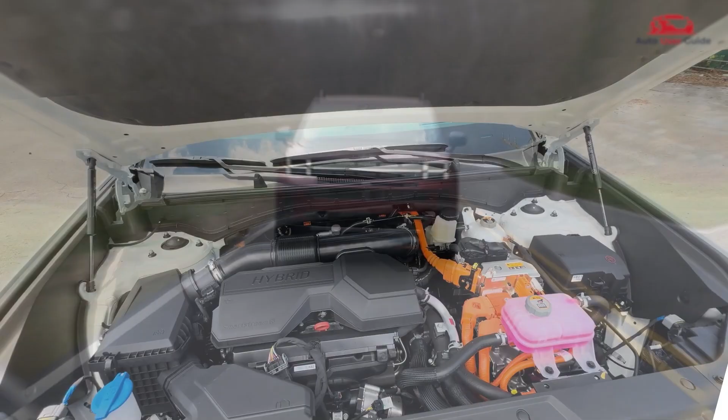Are you trying to locate the fuse box in your 2026 Hyundai Sonata? In this video, we're checking out all the fuse boxes from the engine compartment to the cabin area. I'll show you where they're located and explain how they keep your sedan's electrical system safe and running smoothly.

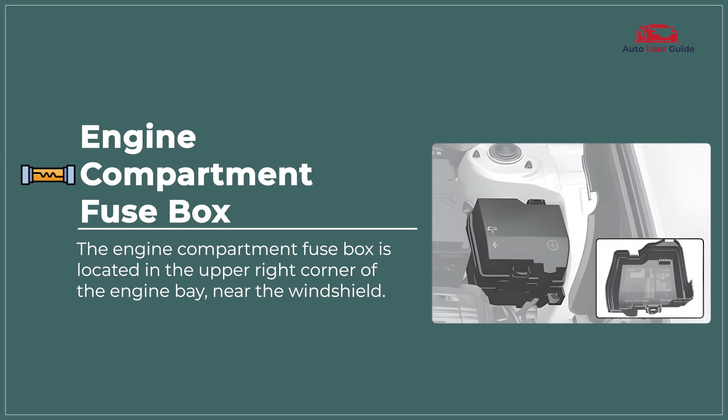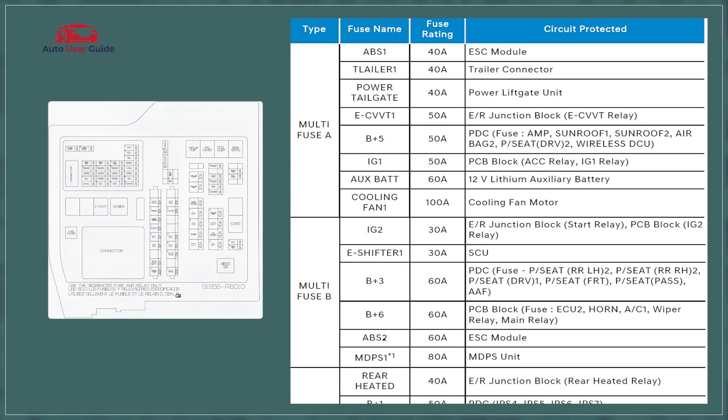Engine compartment fuse box. The engine compartment fuse box houses fuses and relays that protect and control critical engine-related systems. It manages components such as the engine control unit, fuel system, cooling fans, and other electrical circuits for safe and reliable operation.

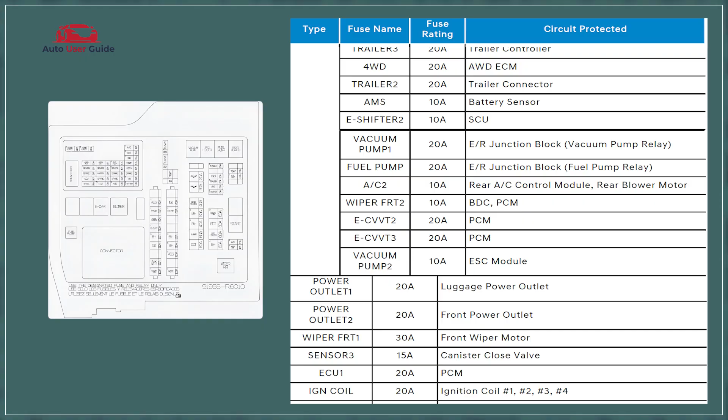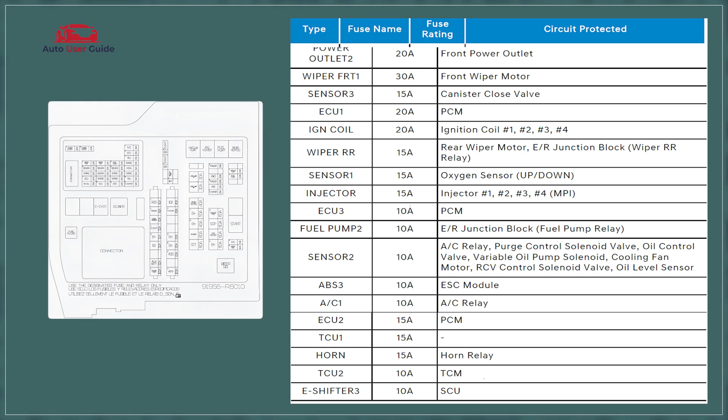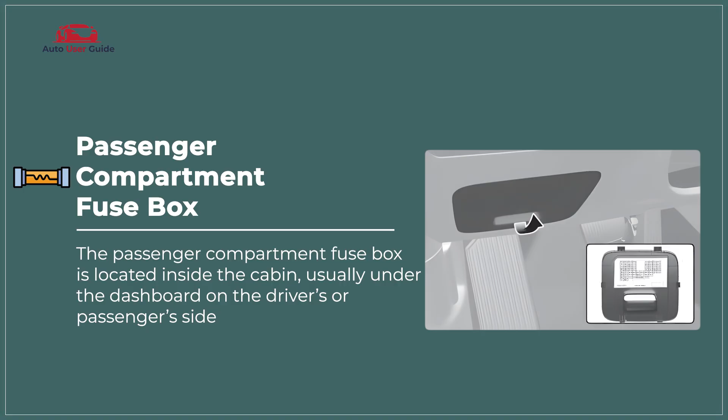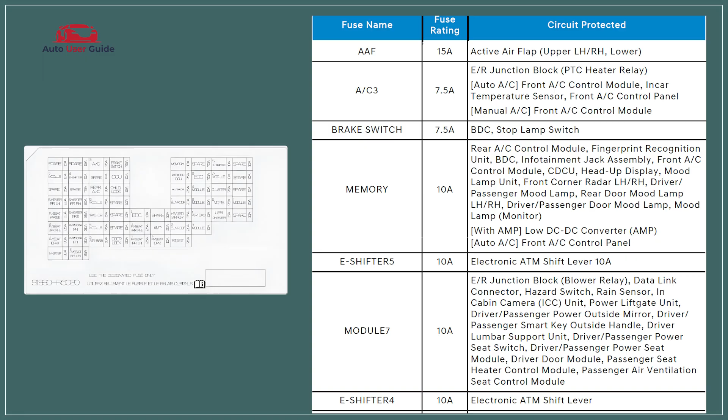Passenger compartment fuse box. The passenger compartment fuse box houses fuses that protect essential interior electrical components. It controls features like power windows, mirrors, infotainment, interior lighting, and other cabin-related systems.

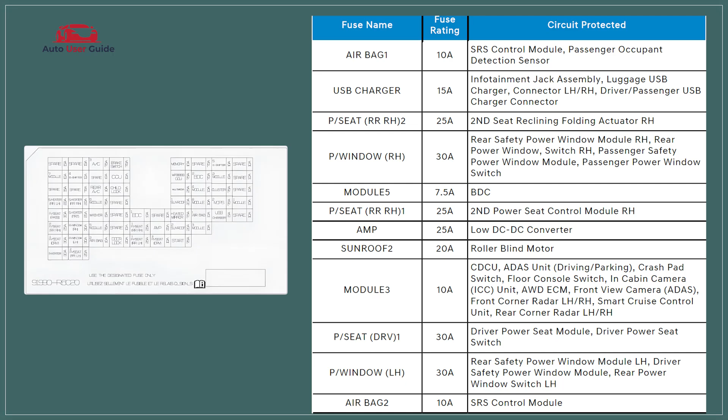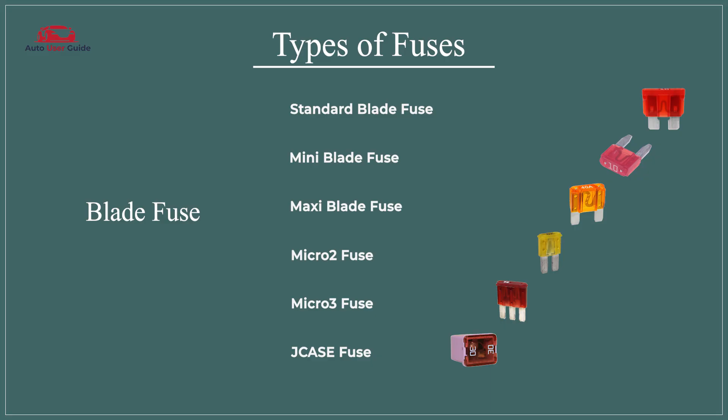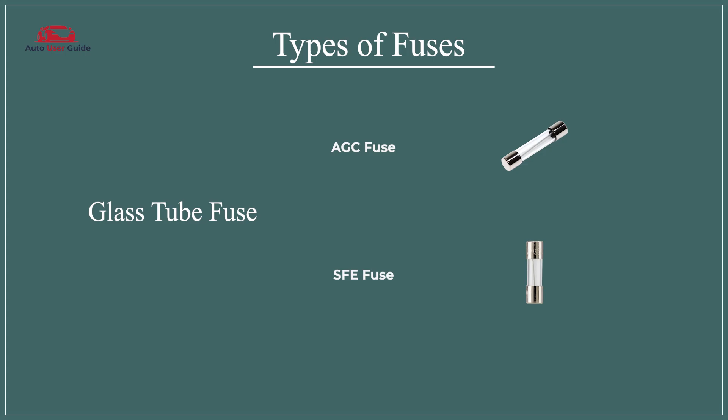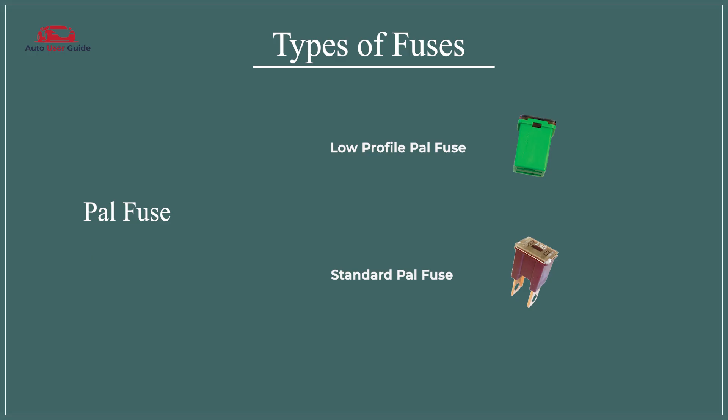Types of fuses: blade fuse, standard blade fuse, mini blade fuse, maxi blade fuse, micro 2 fuse, micro 3 fuse, J-case fuse. Glass tube fuse, AGC fuse, SFE fuse. Ceramic fuse, Bosch fuse, DIN fuse. PAL fuse, low profile PAL fuse, standard PAL fuse. Link fuse, mega fuse, high amperage link fuse.

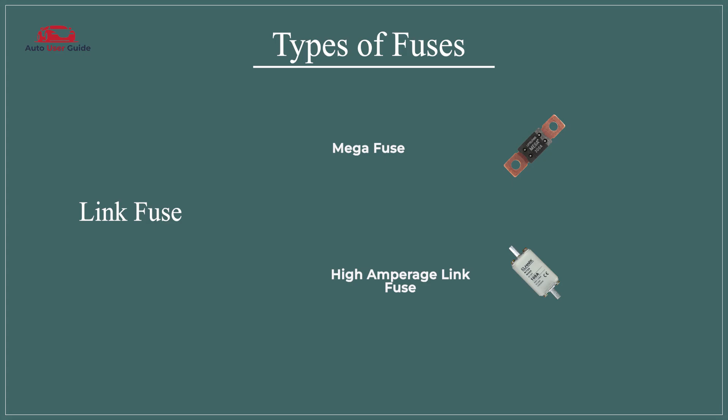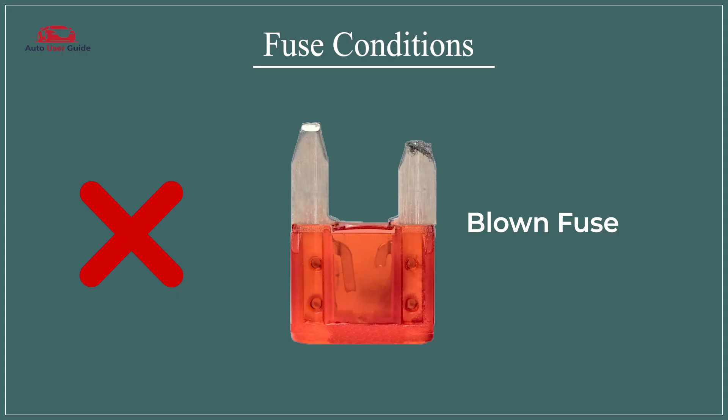Fuse conditions. Blown fuse: a blown fuse means it's no longer functioning and needs replacement, while a perfect fuse is in good working condition and performing as expected.

How to change fuses: turn off the vehicle, locate the fuse box, identify the faulty fuse, remove the faulty fuse, inspect and obtain a replacement, install the new fuse, test the replacement.

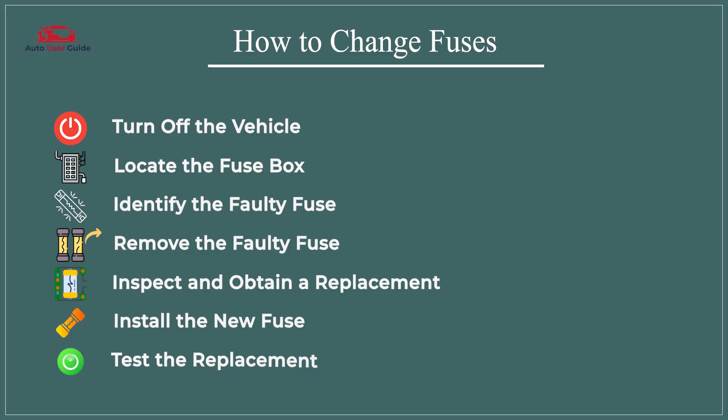Safety precautions: disconnect the battery, wear protective gear, use proper tools, check for correct amperage, avoid water exposure.